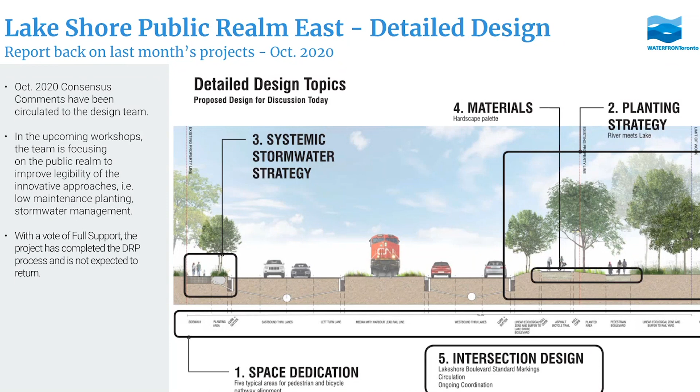Okay, next slide, Leon.

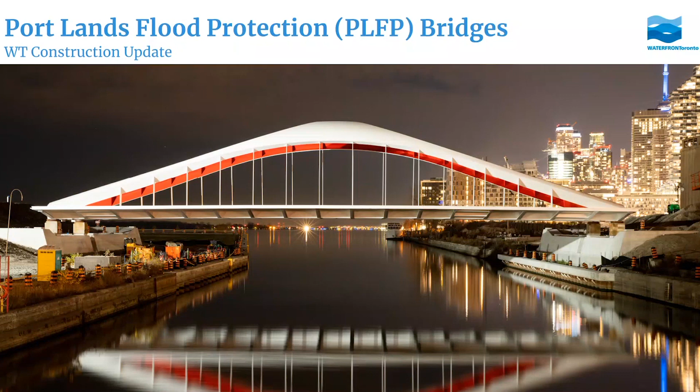Oh, and then Leon has an item. Yes, I wanted to just take a couple of minutes, if we can, at the end of the public session here, to show you an update on the DRP handbook covers. We spoke about these two months ago, and these are some of the comments I received, things to consider. So we took another stab at it, and it's still mock-ups at the moment. I'll show you a couple of options. We're really trying to find a direction that we like and can confidently give over to the graphic designer to keep working. The text, the logo, stuff you see there are just placeholders, but we're particularly interested in the image selection, and the number of images, or whether it sets the tone of what we were talking about a little bit better. So I have a couple of options here, starting with

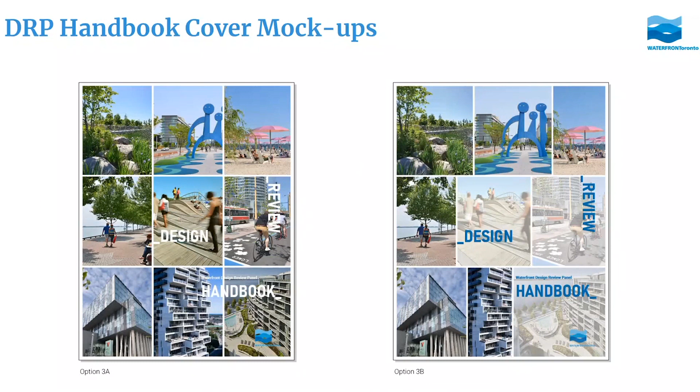Right, I agree George. Fadi here, if I could jump in real quick. I'm of the mind of keeping the main cover pretty minimal, then having maybe the first image, once you open the cover page, as a secondary title cover with some of the images of projects, so it keeps it nice and sleek and clean. Also, because there's a ton of projects in the pipeline, there's a way to be a little bit less self-referential and more within the branding overall of Waterfront Design Review - kind of those really beautiful illustrations of the annual report, for example, that has these really beautiful, very minimal, sleek graphics of the overall identity of Waterfront Toronto. But then you could easily open the first page after this one and see an image collage like this of key projects that demonstrate design excellence. But personally, just from pure personal taste, I love the minimal aesthetic of the other reports. So maybe something in that family, and then photographs come in as these amazing splash pages across the document that show some of the design excellence within it. But that's taste.

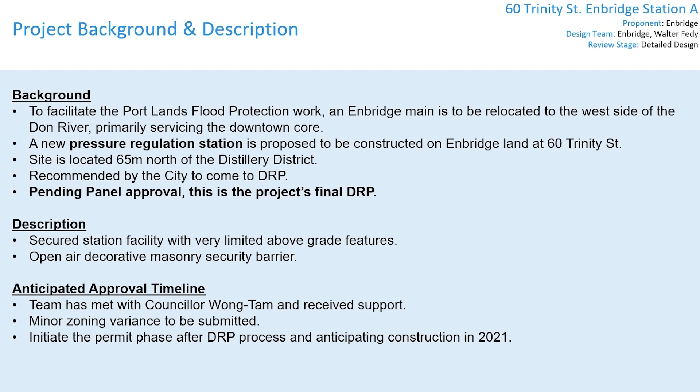Once again, the site is located north of the intersection of Mill Street and Trinity. There are future local streets A and B just south of the site. The site is located adjacent to many existing and future developments across from Blocks 3, 4, 7. The future Block 2 is just west of the site. It's also adjacent to the historic 50 Mill and Rack House D at 60 Mill.

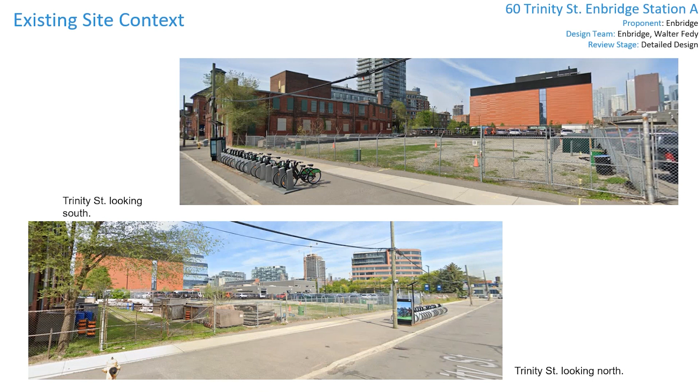This is the current condition of the site. The team came to DRP in July to present a hybrid schematic design and issues ID presentation. Today, they're here to address some specific panel comments and discuss some additional details.

These are the consensus comments from last time. It is important to reference the design of the adjacent development, Blocks 3, 4, 7, with regards to street frontage, facade materiality, and landscape context. Waterfront Toronto to share the documentation with the proponent that has been done. The site is located next to the most historic district of Toronto, so it's very important for the project to fit into both existing and future contexts. There are precedents of highly contextual hydro facilities, so carefully consider how this project can evolve the typology to respond to the site.

It's important to set a precedent for a well-integrated contextual public infrastructure facility building in the West Don Lands. For the building itself, consider the visual impact of the building and site as viewed from high up, and also consider revisiting the design of the roof structure to accommodate a green roof.

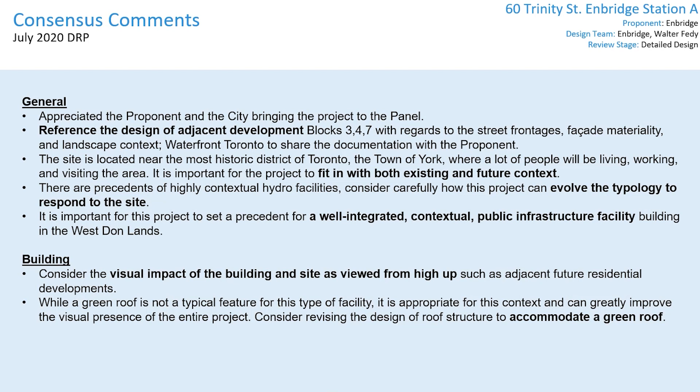For the perimeter wall, the panel was not supportive of the use of barbed wire and chain link fence. Consider alternative strategies. It was recommended to utilize a real brick finish and not painted precast, and also consider other animation strategies at the perimeter wall. Also consider the visual identity and signage use. For the landscape, consider planting trees in the corner to improve street level and aerial presence.

The panel voted for non-support for this project last time. So today we would like to ask the panel to consider: does the revised brick exterior adequately address the context of West Don Lands and the Distillery District? Do the revised perimeter details adequately balance the need for site security while supporting Waterfront Toronto's objectives of design excellence? Does the updated design improve the visual impact of the building as viewed from high up? And finally, is there sufficient lighting around the site so pedestrians would feel safe and secure at night?

Thank you. I would now like to introduce Mohammed from Enbridge to continue the design presentation.

Hello, Mohammed. Good morning. Thanks, Leon. Can you hear me clearly before I continue? Yes, I can. Okay, I'm going to go ahead and share my screen here.

Thanks again for inviting us, it's a great opportunity here. My name is Mohammed Salman, and I'm a senior advisor with engineering construction here with Enbridge. I'll be the project manager looking after the construction for this project. I've taken over from Mike Abate, who was here back in July. Some of the panel members might have been familiar with him - that's the reason for the change of faces here. Mike has moved on, and I've taken on this project from him.

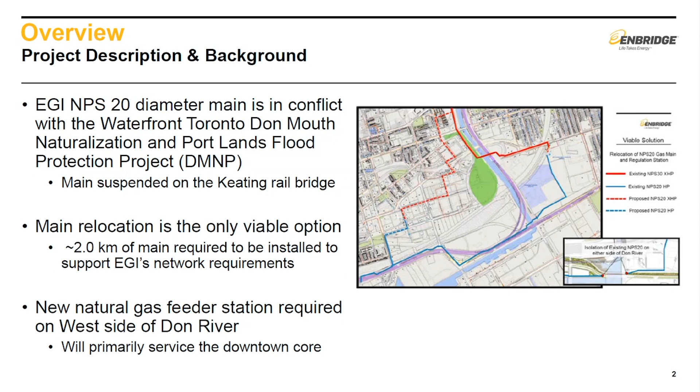I'll move on to the following slide, similar to what we discussed in the previous presentation, to highlight the key design requirements when we considered designing this facility. We had 5 key elements to consider. The top ones are functionality and safety, as well as site security, given the proximity to high density areas. We needed to ensure that the site does not generate noise, given the high profile and density of the area, as well as it being aesthetically pleasing and having reduced lighting. That's something we will elaborate on.

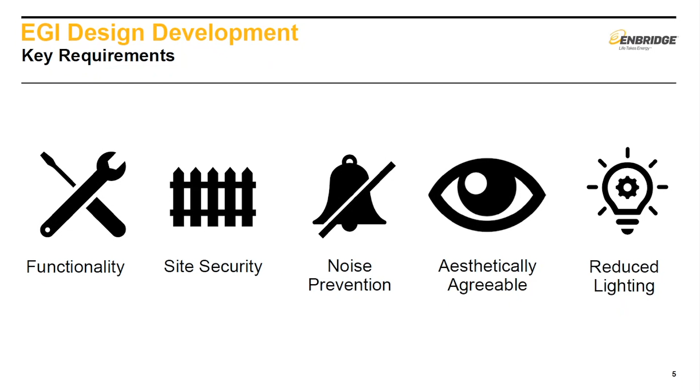I'll go on to the following slide, which talks in relative detail about what we considered additionally with regard to each of those areas. In terms of functionality, we ensured that the site only included elements that are necessary to the station function. It's something we cannot compromise on. We made sure that the station operation and safety are not compromised at all.

In terms of site security, we have a 5.1 meter tall open air decorative brick wall as a security barrier. It also has see-through features to accommodate the decorative aspect and fit into the site. We're also going to have an integrated site security system, connected to our real estate security system. In terms of noise prevention, I'd say this is a precedent we're setting for this type of station.

We've moved a lot of what could have been above grade facilities into below grade. These are the pressure regulating equipment that could have continuously produced humming noises that wouldn't have been acceptable in a site like this.

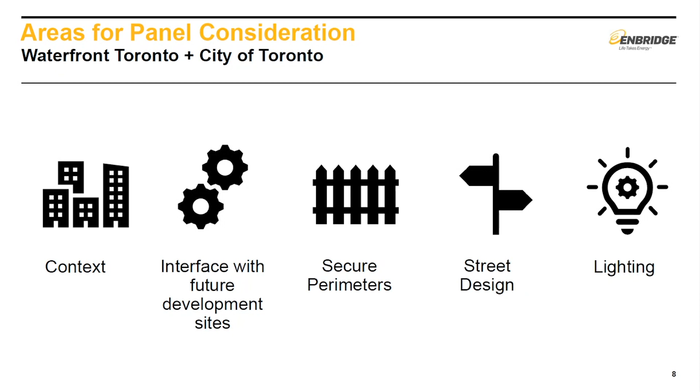I'm not going to cover this in detail—Leon just covered it in his presentation—but I just want to emphasize our awareness of what the DRP is looking for on this project site.

These slides might again be similar for the most part to what we've presented, just reiterating what our architects considered in coming up with the proposed design. We've gone out to see what the Distillery District, the most historic site in Toronto, looks like, and how we could fit in with the character, the history, and the context.

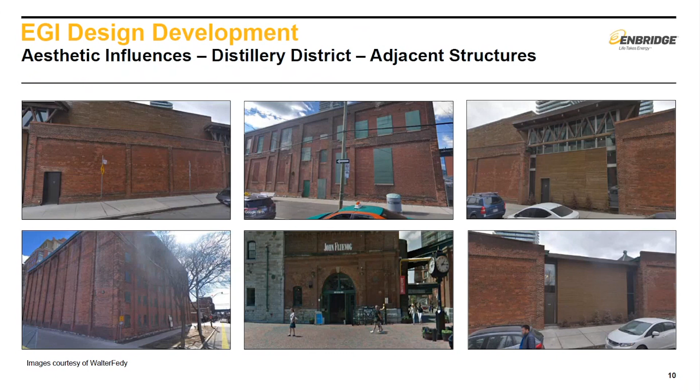This one talks specifically about adjacent structures and what the major elements look like, and the following slide talks about the presence of the period brick walls, which is what we've tried to adopt for our perimeter wall.

The following one talks specifically to lighting fixtures, examples of what exists today in the Distillery District, whether historic components or some of the newer developments and stores in the area.

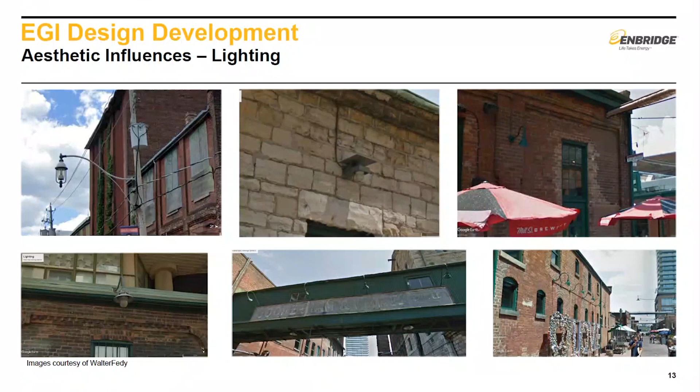If there are any questions, Stephen, our architect from WalterFedy, is available to comment on some of these questions, specifically what was considered during the architectural design.

So I'm going to move on. These slides essentially capture our current proposed design and reference the feedback we received back in July. Leon listed it, and I tried to put all the comments on one slide.

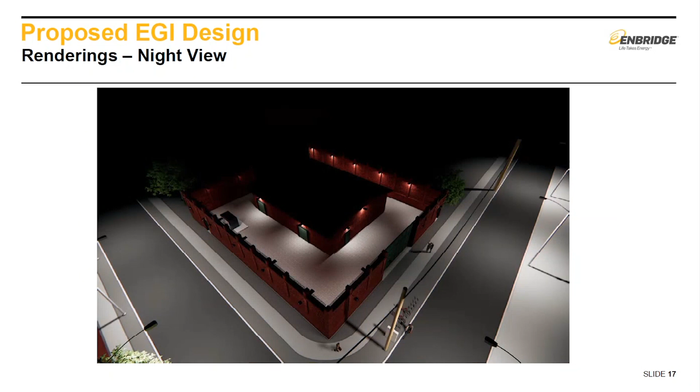I'm going to go to the other slide here, where you can see the 3D elements that we've incorporated in the brick wall, the gaps or the see-through. I think it's going to be both aesthetically pleasing for people to be able to see through for the site, as well as it addresses our own safety and security standards, where staff needs to be able to see if they're walking into a hazard or not. So I think we've certainly tried

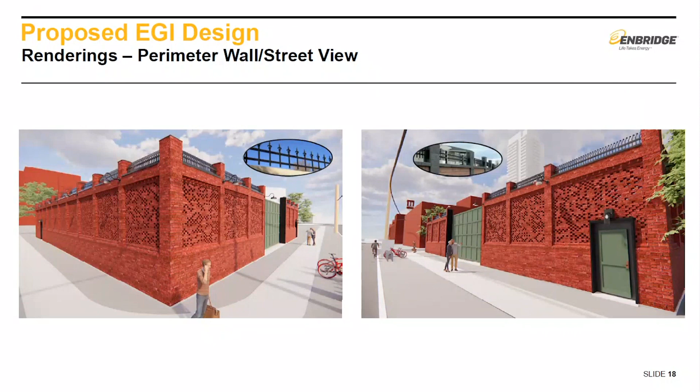to accommodate and have that conversation between our design requirements as well as the DRP's considerations. We're still working through the details for the wrought iron, so these are also examples of what it may look like, trying to incorporate it into the design. I'll move on to the following slide, which shows essentially the same views at night to demonstrate what it would look like with the lighting fixtures and so on.

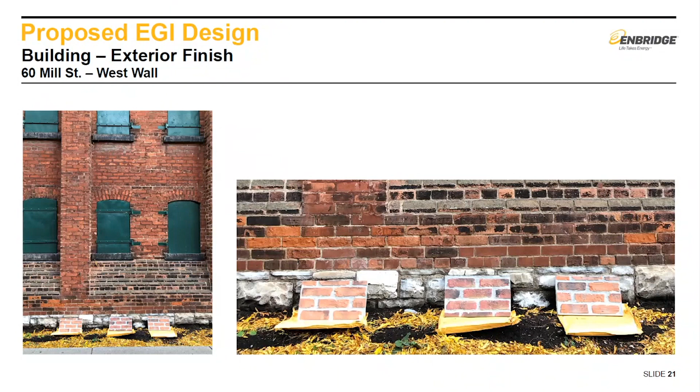The following slide is the same samples just against 60 Mill Street, the adjacent building to our station site. And like I said, we would like to hear what the DRP thinks between these 3 samples. These are only going to be used for the building, not for the exterior wall, which will be real small brick, to be more fitting in the distillery district in this area.

So with this, I'm just going to talk about the timelines. We're hoping that if we get a favorable decision from the DRP with the items we've addressed, we'll be able to move ahead with applying for permits with the City of Toronto, so that we're able to construct into possibly the second quarter of 2021, and get the station in service to accommodate the original request and timelines from Waterfront Toronto. We're certainly open for feedback and comments, but we're also hoping that by addressing most of the comments we've received, we can get a favorable solution here.

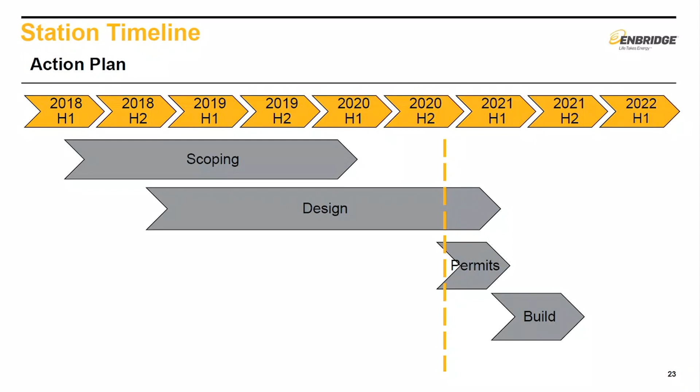And with that, I think this should conclude my presentation, Leon. But before I do so, if I can have a couple minutes before we get into questions to show a couple more renderings that I have in the appendix.

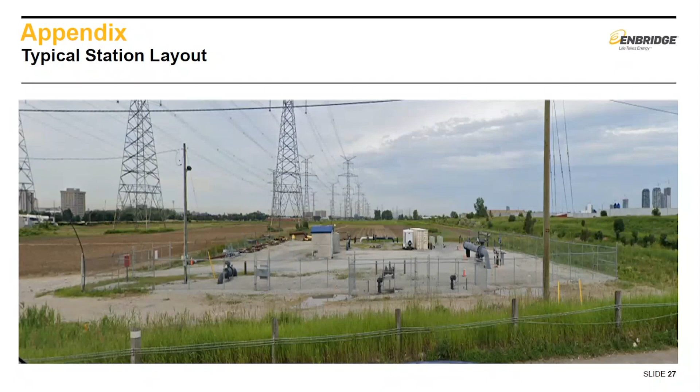This is what another station would have looked like, and I think it demonstrates how far our team, with the help of comments from the DRP, has departed from an existing design, to make sure that we're fitting in the character and history of the distillery district. That's another example of what it would look like, with components above grade, insulation applied, jersey barriers, and fencing inside — every separate component would have its own separate structure and building. It's not something that anyone would have liked or even proposed to have in an area of such historic and heritage value, but it's just to demonstrate

how responsive our team has been with the help from comments that we received from the DRP since July. With this, Leon, I think I'll give it back to see if there are points for discussion or questions.

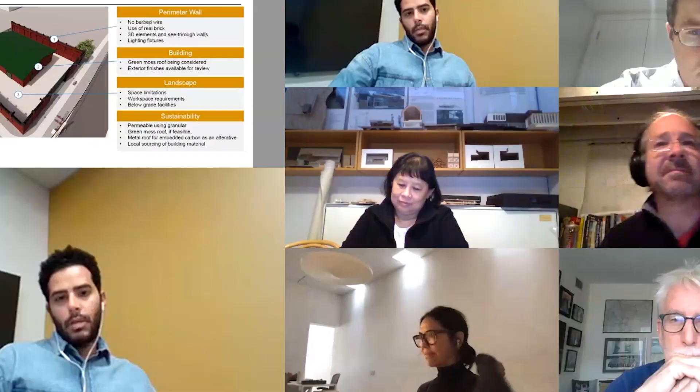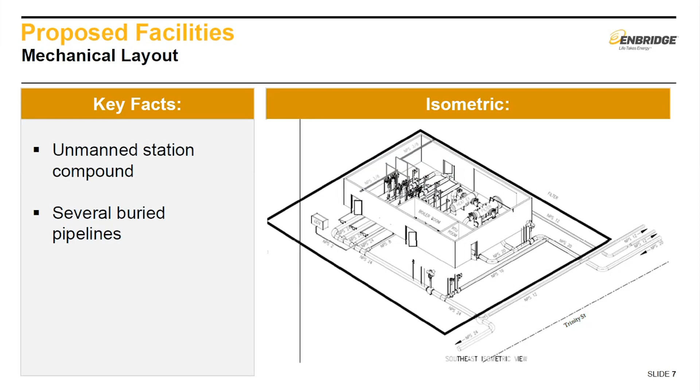My understanding from our design folks - let me share my screen again before getting into the details. I'm going to jump between this slide and this slide back here where we have the equipment. So if you can visualize where the roof is, this side, the western part of the building, is where we anticipate the removal of the roof would be needed to facilitate the future replacement of those below grade facilities. If you had a north-south division and cut it in thirds, the western third is probably a place where you wouldn't be able to accommodate the sedum roof.

We've been working to try and avoid this. All these doors on all the sides of the building would facilitate whatever maintenance is needed. On the north side, we even have a garage size door that would both be aesthetically pleasing and at the same time functional for us to get in whatever equipment to do replacement to both the filter and the heater.

On the west side, that's where the major undertaking will be taking place in the future when we go and replace the below grade regulators. The roof would have to be removed, cranes would have to be present, excavation will have to take place, and that's in big part why one third of that would not be green roof.

And my last very quick question, seeing the gate at the back on the west side, I'm assuming there's some kind of laneway as part of the block. Is it through a laneway, or is that wall slightly inside your property? In the future when the car dealership develops, is it through their property? Just trying to understand.

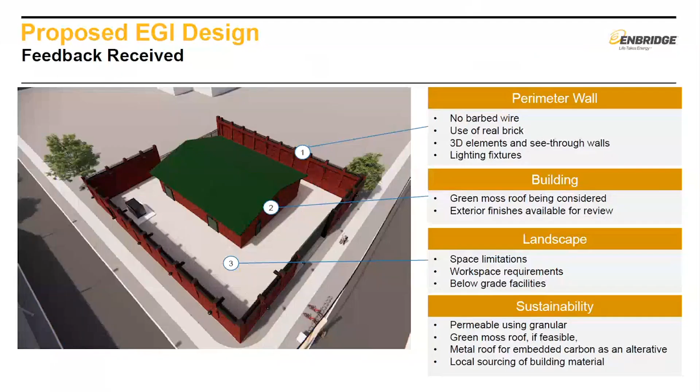Thanks very much for the presentation, and I concur with my colleagues. It's much improved, and it's appreciated that you'll be constructing the perimeter wall out of brick. Whether it be brick embedded into precast is something you could also consider. I realize these are precast options, but I want to point out, reinforcing Bridget's comment, that the type of brick is absolutely critical to how this wall will appear. And also the grout joint.

With most of the older buildings in the distillery district, the joint between the bricks is usually quite narrow. Your mock-up, which I realize is for the building, and I'd agree brick isn't necessary on the building, has a very wide grout line. So as your architect works through detailing the perimeter wall, that joint really needs to be considered. It really shouldn't be, even 10 millimeters is out of character with the heritage brick walls in the distillery district. You can find a brick that will be different, but look for a molded brick, not a pressed brick. It won't be identical, but it will have that softer kind of appearance. So really pay attention to grout joints and a molded brick.

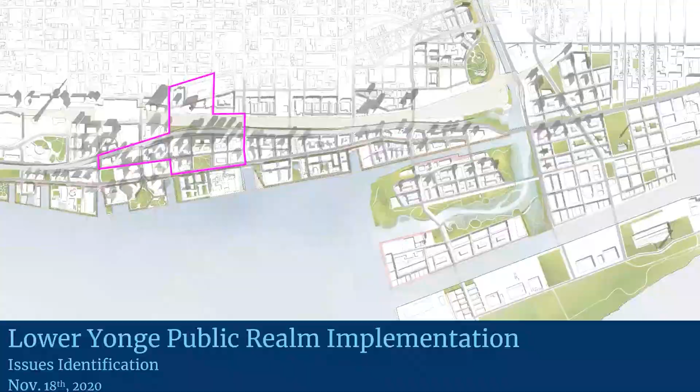I also want to note, this project is a culmination of several previous projects that have come before the panel, including the Lower Yonge Public Realm Plan, the Lower Yonge Precinct Plan, and the Lower Yonge Precinct EA. I'll now turn it over to Prabir with City of Toronto to present the project background, context, and schedule.

Thanks, Adam. Who will be changing the slides? Can you help me with that? Yes, okay, perfect, thanks a lot. So hi everyone, this is Prabir Das. I'm working for the city, and I am the project manager from the city's end on this assignment.

Thanks for the opportunity to present the overall scope and timelines and much more details to the design review panel. I'll go through a couple of introductory slides giving overall area, 30% scope, and timeline. We have our consultants also present, and they will be sharing some of the items in much more detail.

From the city, the consultant working on this file is WSP, and Jim is the PM on this team. And Nader from City Planning is the project support from this end. Adam already mentioned his area of involvement on this file from Waterfront Toronto.

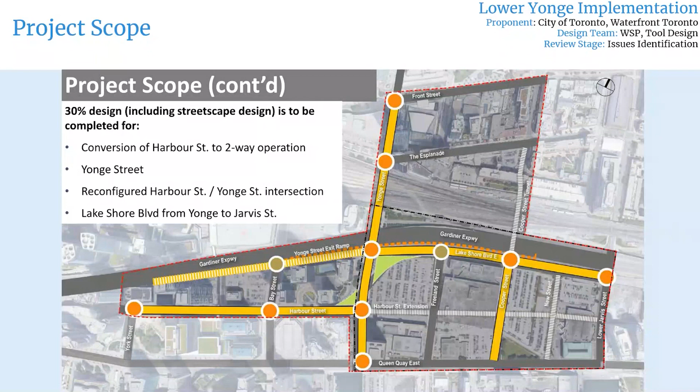Basically, each of these scopes will be further detailed down by our consultant team to all of you later today. But at a high level, that's the scope we are working on. So, if we go to the next slide, that's the timeline.

So that was from our city end. We are really happy to present our initial thinking, where we are, and what scopes we are keeping in mind. We're quite open to get feedback from the team at this DRP, and we can start any conversation to see the merit of the feedback and how we can accommodate it. Thank you.

Now I'd like to summarize the recap from the September 2015 DRP given for the public realm strategy consensus comments. The comments were: what is the city getting back, and what is it going to look like 10 to 50 years from now? In terms of principles, density will be fine, provided transit infrastructure is there to support it and community services are in place. It is absolutely critical for these to be in place.

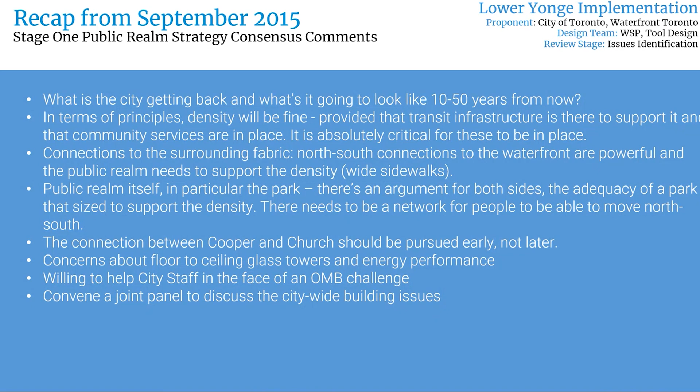The connection between Cooper and Church should be pursued earlier, not later. There were concerns about the floor-to-ceiling glass towers and energy performance, willing to help city staff in the face of an OMB challenge, and convene a joint panel to discuss citywide building issues.

The project also came back in December 2015 for stage 2, and the consensus comments were as follows: the panel will accept the location of the proposed park.

The emphasis on north-south promenade connections is good. There should be no above-grade bridges within the precinct area, and perhaps consider whether it's necessary to have a bridge over Lake Shore Boulevard. Be cognizant of the heritage buildings on site. A public art plan is an important aspect to create a strong public realm for the precinct. The panel voted unanimously in support of the project.

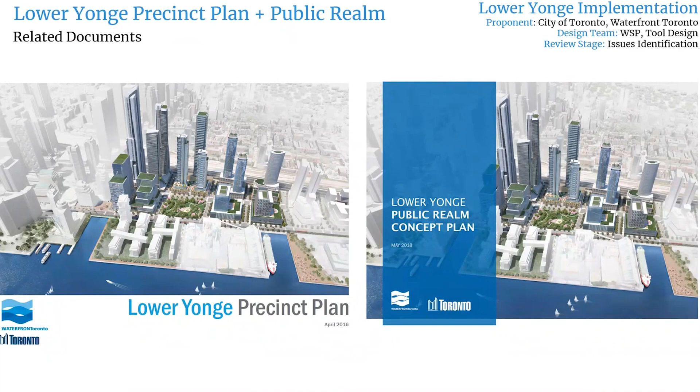I also want to summarize in more detail these background projects, including the precinct plan and the public realm plan, for the panel's reference, as this project builds upon those.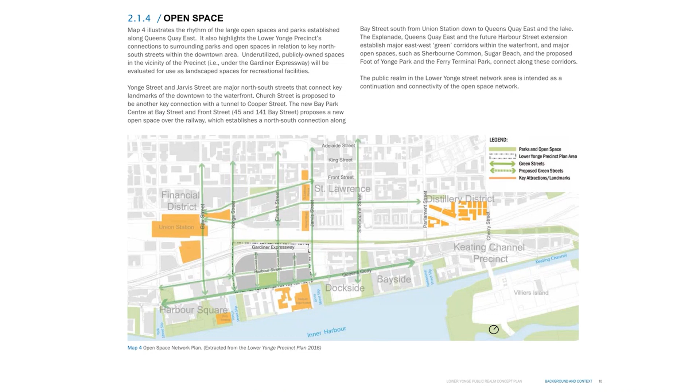Also want to highlight Lower Yonge's connections to the surrounding park and public space in relation to key north-south streets within the downtown core - that's one of the main objectives of this project. We also want to encourage the activation and connection to underutilized publicly owned spaces in the vicinity of Lower Yonge, such as under the Gardiner.

We're also looking at mid-block connections within the public realm plan. The plan illustrated a finer grain network to connect people through building sites and enhance pedestrian permeability. We're striving to encourage walking and discourage the use of automobiles for short trips.

Within the public realm plan, we also identified 4 types of streets. I'll go through the hierarchy: the intention is Queens Quay East would be a main street primary, and Harbor Street would be a main street local - the two major east-west streets.

In terms of promenade streets, really enforcing the north-south connection: starting on the west, Yonge is first, then Cooper, and Lower Jarvis. In terms of neighborhood streets, Freeland and New Street are considered the neighborhood streets.

I also want to quickly highlight, since this is the only spot I'm showing it in plan, the public realm plan also emphasized and dictated the various hierarchies for the street trees lining the street. The intention is Queens Quay has a triple alley of trees, one row on the north, two on the south. Harbor Street has a double alley, one row on the north, one on the south. Yonge, Cooper, and Jarvis all have a triple alley, and Freeland and New Street all have a double alley.

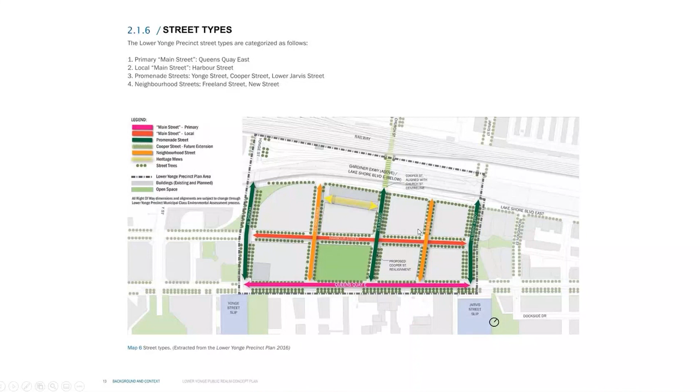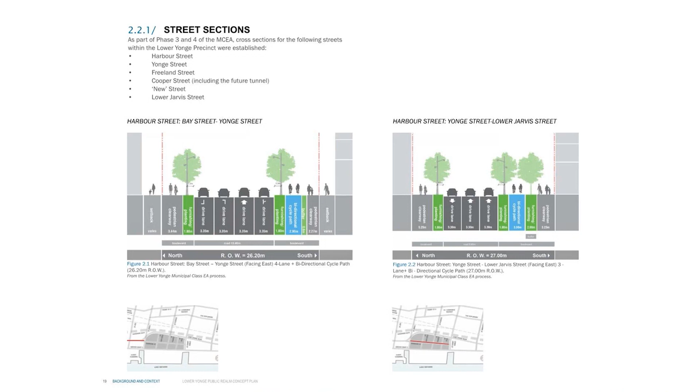I'll quickly go through the street sections, since WSP will cover this in more detail in their presentation. But essentially for Harbor Street, between Bay and Yonge, we're proposing a 4-lane street with a bidirectional cycle track. And for Harbor, between Yonge and Lower Jarvis, we're proposing 3 lanes with a bidirectional cycle path.

Next, moving on to Yonge, the north-south connection. South of Harbor, 3 lanes with unidirectional cycle tracks is proposed. North of Harbor to Lakeshore, 4 lanes with unidirectional cycle track is proposed for the street section.

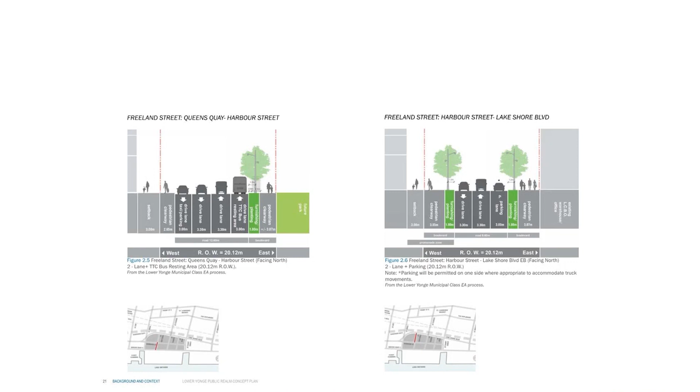Moving to Freeland Street, still a north-south connection but one street to the east. Between Queens Quay and Harbor, a 2-lane street with TTC resting area is being proposed. Between Harbor and Lakeshore, 2 lanes plus parking is being proposed where appropriate.

Moving further east, on Cooper between Queens Quay and Lakeshore, we're proposing 3 lanes with a future unidirectional bike facility. On New Street, 2 lanes plus parking. On Lower Jarvis, 4 lanes plus off-peak parking plus unidirectional cycle tracks. And on Lakeshore, 3 lanes plus a wider boulevard.

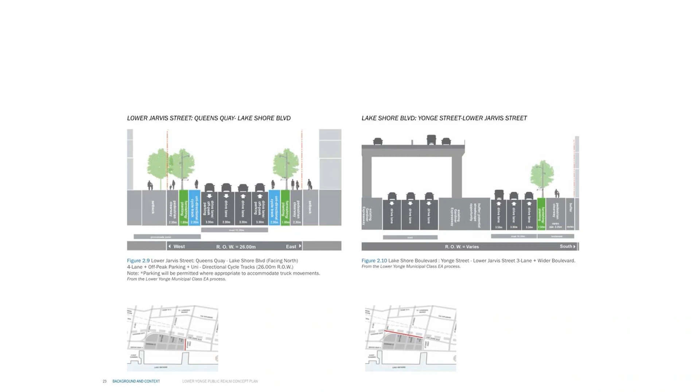I also want to quickly highlight the streetscape plan, as WSP will go into more detail. The main objective was to provide a paving palette for consistency, creating a coherent sense of identity within the precinct, and to provide consistency throughout the rest of the waterfront.

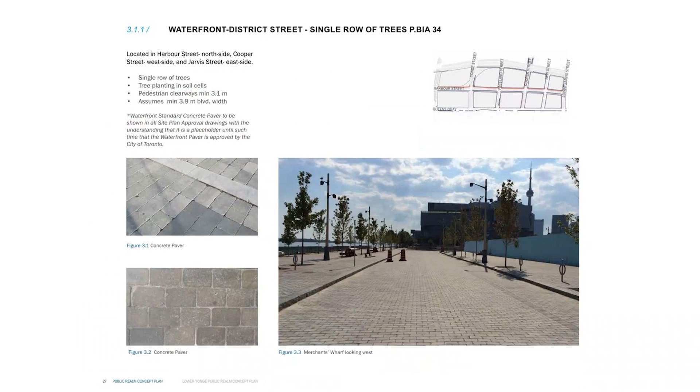With regards to street materials: on the north side of Harbor Street, Cooper Street, and Jarvis, we're proposing a single row of trees with our typical concrete paver. For Yonge Street on the east side, Cooper Street on the east side, and Jarvis Street on the west side, we're proposing a double alley of trees with the traditional concrete paver.

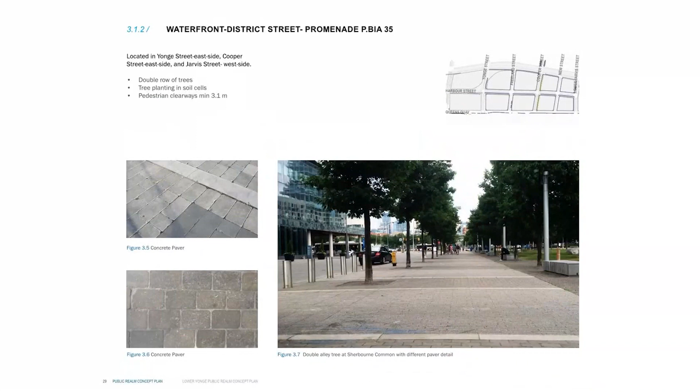For Harbor Street on the south side, we're proposing a double row of trees combined with cast-in-place concrete and concrete pavers. For the service streets, Yonge on the west side, Freeland Street and New Street, we're proposing a single row of trees and cast-in-place concrete paving.

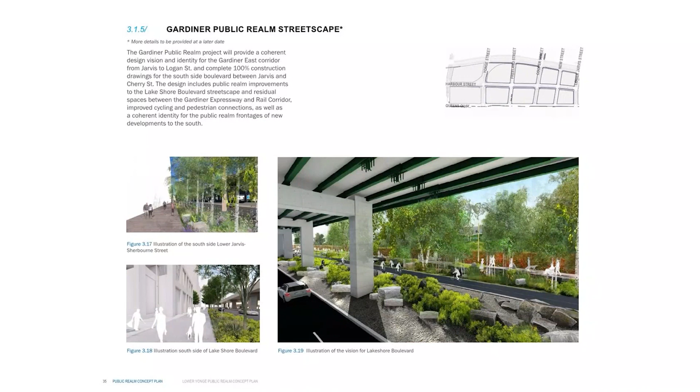For the Gardiner public realm, we're also acknowledging that we want to create a consistent identity with the rest of the Gardiner public streetscape realm. Lastly, for Queens Quay, for reference in the interim condition, we're proposing a double row of trees on the south and a single row on the north.

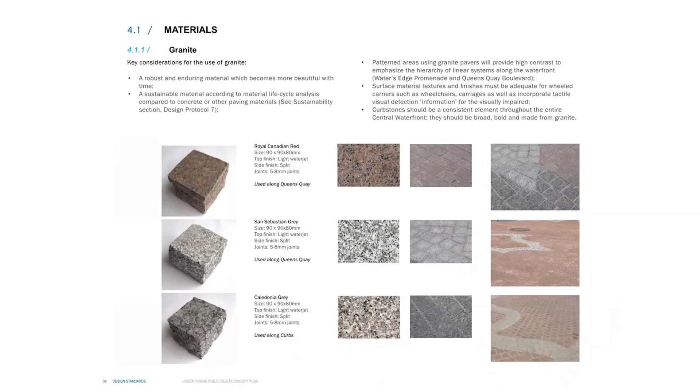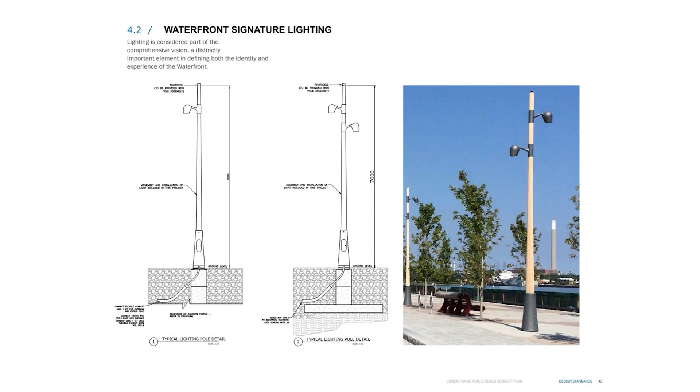Lastly, I want to touch on materials and design standards from the public realm plan. Consistent with the rest of the waterfront: granite in the colors used elsewhere, concrete pavers as used elsewhere, cast-in-place concrete—we're still considering the exact standard for the concrete. The idea is a signature light pole consistent with the waterfront, a consistent family of street furniture, and consistent planting details.

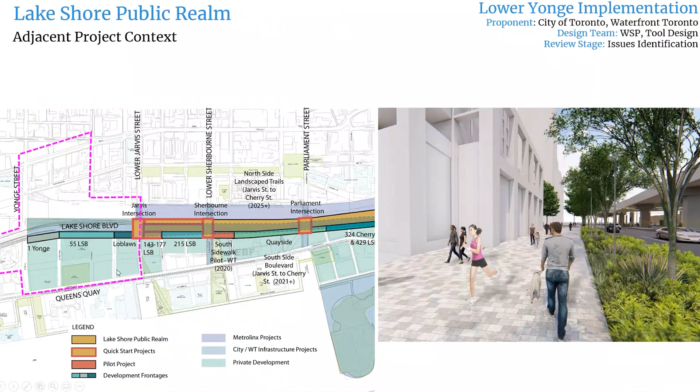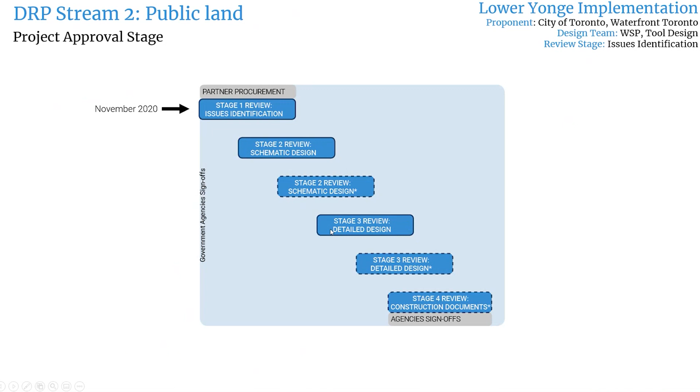Lastly, I want to go through the DRP process for this project. Right now we're at November 2020 for issues ID, and we intend to come back in the future for stage 2 schematic design, stage 3 detailed design, and at some point in the future for stage 4 construction documents as required.

Lastly, areas for panel consideration: first, ensuring the precinct vision is adequately implemented in preliminary and detailed design; integration with adjacent major projects and other efforts done to date, such as Lakeshore Boulevard work; ensuring the configuration of street trees meets the vision documented in the Lower Yonge precinct plan; and looking at material and furniture alignments as defined in the Lower Yonge precinct plan, maintaining consistency with waterfront standards.

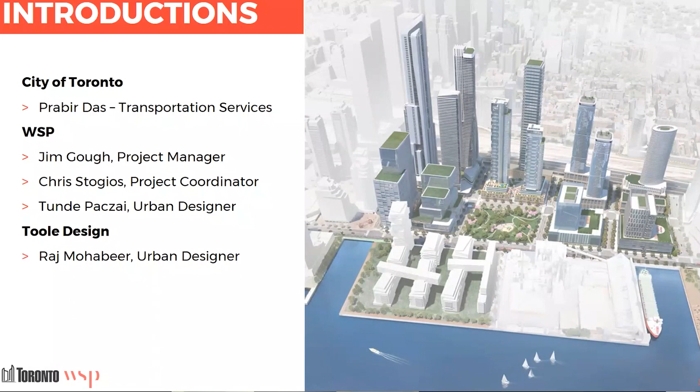Tunde, next. So Prabir already kind of introduced the team from WSP. I'm the project manager. Chris Stogios is on the line, I think, and he's the project coordinator. Tunde is the urban designer, and we also have Toole Design helping out as well.

Next, so the project description very quickly. The Lower Yonge precinct boundary is shown as the black dashed line, which you're all probably familiar with. The city in their RFP to us actually expanded that to include the area shown in the red dashed line, just to include a couple of other projects that we'll talk about in a moment.

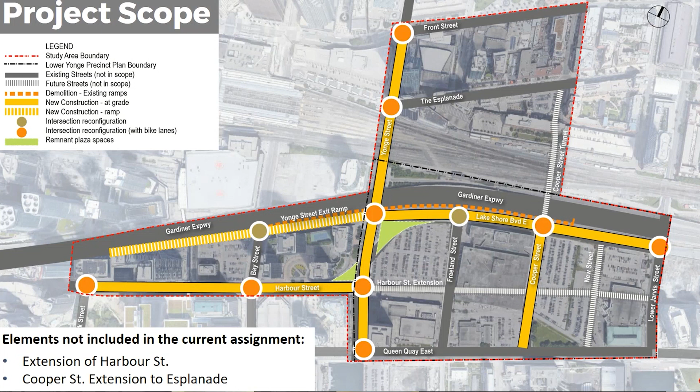Next, so the project scope, Prabir already showed this slide. I just want to highlight things that are not included, and those are the extension of Harbour Street east of Yonge over to Jarvis, the Cooper extension to the Esplanade, and also the new street running north-south between Cooper and Lower Jarvis. The two southerly pieces there are going to be delivered by Pinnacle and Menkes, and the Cooper Street tunnel is down the road in terms of the city's planning for that.

Tunde? So what is included is the 30% design, including streetscape, for the conversion of Harbour Street to two-way operation, the changes to Yonge Street, the reconfigured Harbour-Yonge intersection, and Lakeshore Boulevard expansion from Yonge over to Jarvis Street. Next.

Just breaking that down a bit, the first thing we would do, not necessarily in chronological order, but one of the key things is to remove the Gardiner Expressway ramps, the eastbound Bay Street on-ramp, and the eastbound Jarvis Street off-ramp. Next.

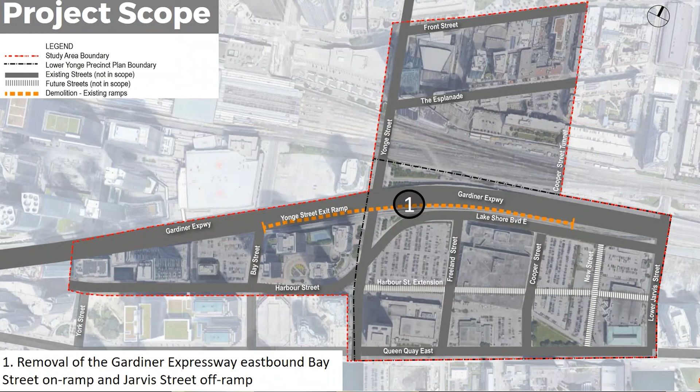And then we would replace the Jarvis Street off-ramp to some degree by a new ramp that would touch down at Yonge Street instead, connecting to Lakeshore Boulevard.

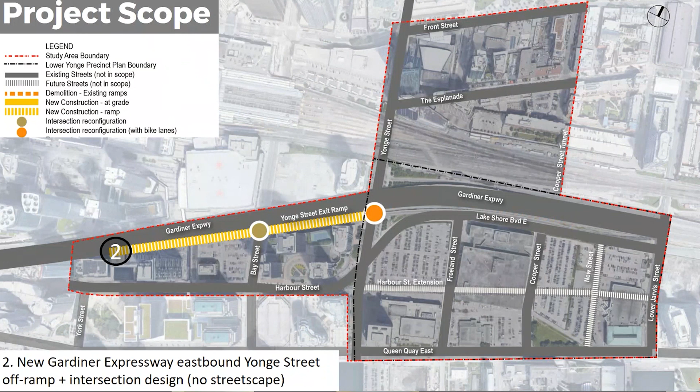Fourth is preliminary engineering design for conversion of Harbour Street to two-way operation between York and Yonge Street, including streetscape improvements. This is largely a matter of restriping. No widening of the street is actually planned as part of this. Next.

On Yonge Street, what we're planning to do is install the cycling infrastructure from Queens Quay up to Front Street and any relevant intersection designs that go along with that. Next.

Number 6 is just defining the profile of Cooper Street between Queens Quay and Lakeshore Boulevard and making sure that the intersection design can accommodate the future tunnel that will lead north from Lakeshore under the Gardiner and the rail corridor. Next.

Number 7 is the conceptual design for the two remnant plaza spaces at the Yonge Harbour intersection when we reconfigure that to a typical cross intersection.

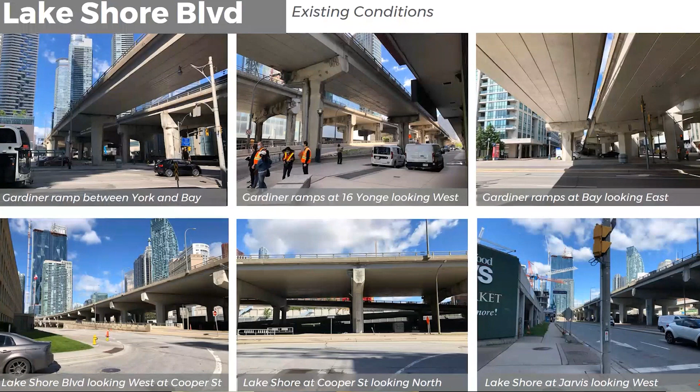You can see the Gardiner ramp between York and Bay, the two eastbound Gardiner on and off ramps currently crossing the airspace between the 16 Yonge parcel and the Gardiner. The pedestrian realm is generally poor, not conducive for walking along the entire stretch, with partial narrow sidewalks on the south side only between Yonge and Jarvis. There are no trees, no bike lanes, minimal indirect street lighting.

A quick overview of the EA plan and cross sections for Lakeshore. The construction of the new Gardiner Expressway eastbound Yonge Street off-ramp between Bay and Yonge is meant to have streetscape along Lakeshore between Yonge and Jarvis. We're also going to look at the intersection designs, proposing streetscape tree planting and sidewalk improvement on the south side.

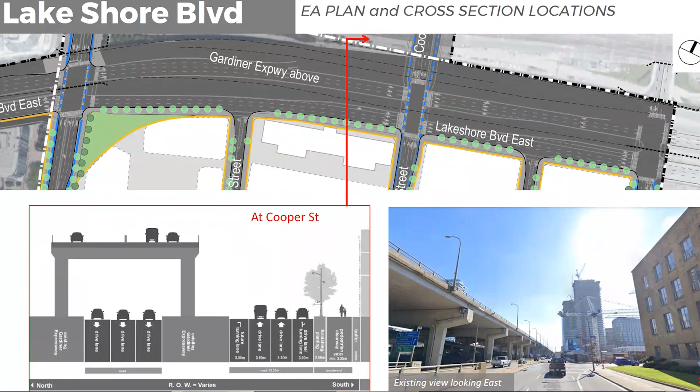Within this stretch, there are two distinct segments. Between Yonge and Cooper Street, we have 3 lanes with 2 turning lanes, and the proposed solution is the same number of lanes with a wider boulevard. The next segment, between Cooper and Jarvis, currently has 3 lanes with 2 turning lanes, with the same proposal of a wider boulevard.

A few considerations for the area are really the coordination with the Gardiner Public Realm Plan. On the south side, we're considering new trees to be planted in tree grates with soil cells, a 2.4 meter pedestrian clearway, and on the north side, the landscaping of the residual space, whatever that might look like.

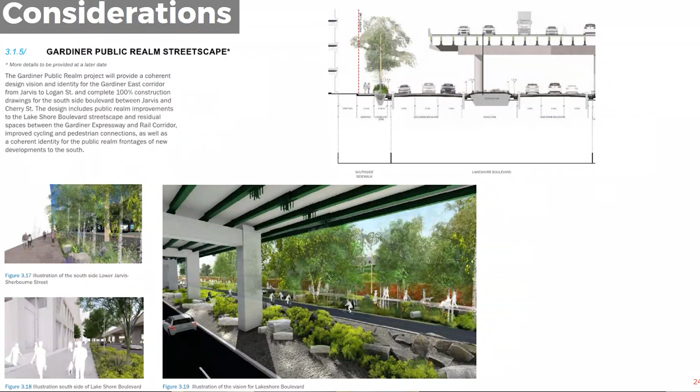A few key issues here are really the consideration for the under-the-Gardiner design development and coordination with that project. In terms of inspiration, we're looking at having some historical accents on the hardscape, some vertical wall or embankment, temporary seasonal art projections at the tunnel, and integrating lighting design for that future underpass at Cooper. That's really where we see an opportunity to do something more meaningful in terms of design.

Harbour Street. That's just a quick view of Harbour Street North on the north side looking east at Yonge. I'm not going to repeat this, but we're really looking at mainly working beyond the curb and towards the property line to improve the sidewalk and streetscape, as well as the intersection redesign at Yonge Street.

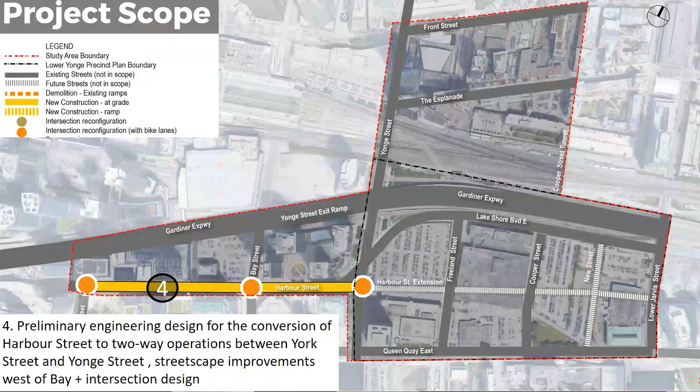Current conditions show one-way traffic operations between York and Yonge Street. Streetscape improvements are completed west of Bay, including the installation of the bidirectional cycle track on the south side, low-profile black granite planters, granite plank pavers on the north side, and updated city light standards. However, east of Bay is where the general existing conditions of the streetscape paving and furnishings are poor—aging and in need of repairs and updates. So perfect timing for us to come in.

Just a quick overview of the EA plan. You will see there's two distinct segments here that we're looking at: the conversion of the two-way operations between York and Yonge Street being the major move, and then the intersection reconfiguration and realignment of the right-of-way.

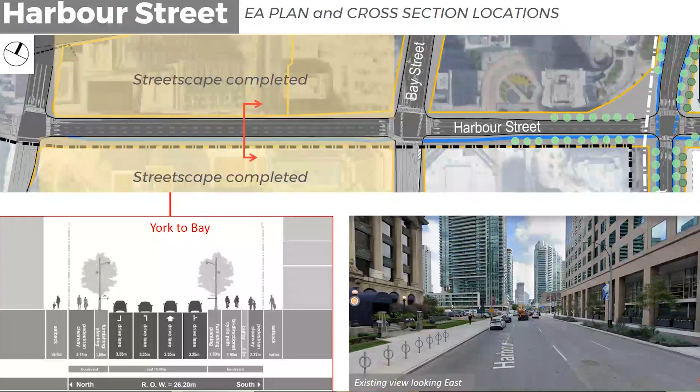In the first segment, as I mentioned, most of the streetscape has already been completed west of Bay. The 4 lanes with one-way traffic currently there, and the bidirectional cycle track, will be converted now to 2-way traffic.

Okay, Harbour, Bay to Yonge.

We're proposing a 4-lane 2-way traffic with a cycle track and planting and street lighting improvements, and complete reconfiguration at Yonge with major changes for the public realm in front of 16 Yonge. 16 Yonge is where we'll have to coordinate delicately with the existing development there, and that conversation has already started.

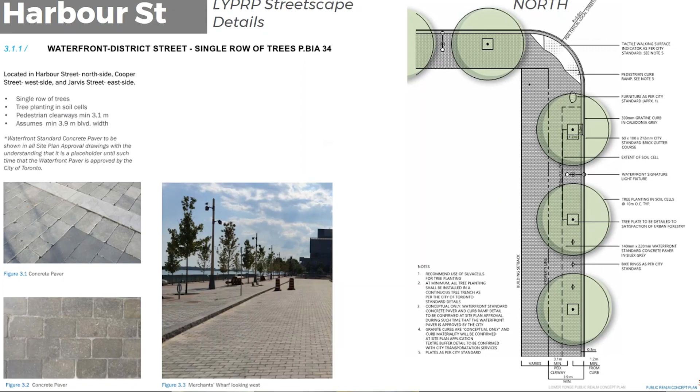Quick reminder of the public realm plan streetscape details. On the north side, there's a single row of trees in soil cells being proposed with a 3.1 meter pedestrian clearway and the standard waterfront concrete pavers. On the south side, we are looking at a double row of trees with soil cells, a clearway of 3.1 meters, and that bidirectional cycle track.

Inspiration for this area, similar, looking at historical accents on the hardscape, some ample seating, tree plantings, and water and mist features to be added to the Northwest Plaza redesign at Harbour and Yonge.

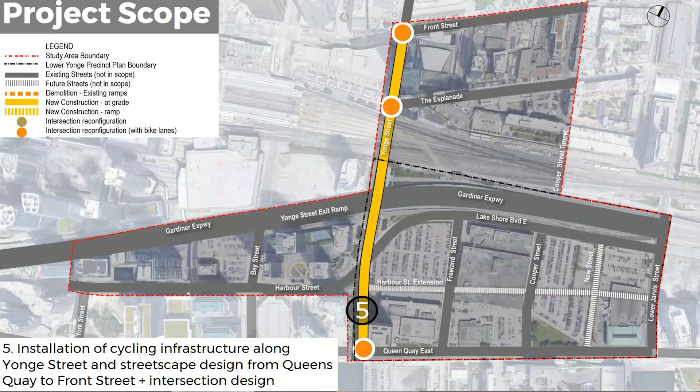And now moving on to Yonge Street. This is a quick view of the current conditions looking south from the west side of the street. The project scope, like Jim mentioned, is really the installation of the cycling infrastructure along Yonge on both sides, streetscape design from Queens Quay to Front, and the intersection designs.

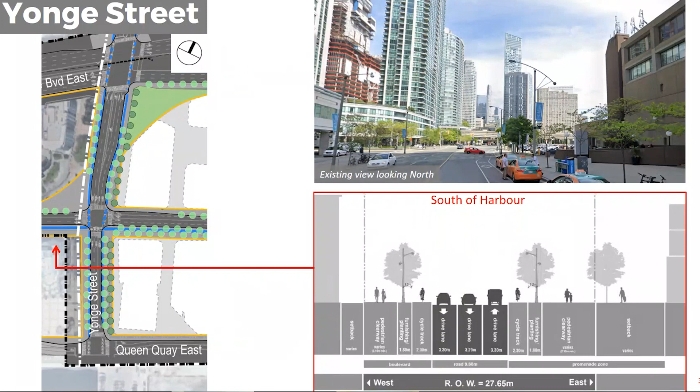Quick snapshot of the 5 distinct segments. The first is at Queens Quay, between Queens Quay and Harbour, where we have 3 lanes with separated cycle tracks proposed, a single row of trees inside the right-of-way and a second row beyond the property line where possible. The next segment, between Harbour and Lakeshore, has 4 lanes plus separated cycle tracks and a single row of trees in tree grates.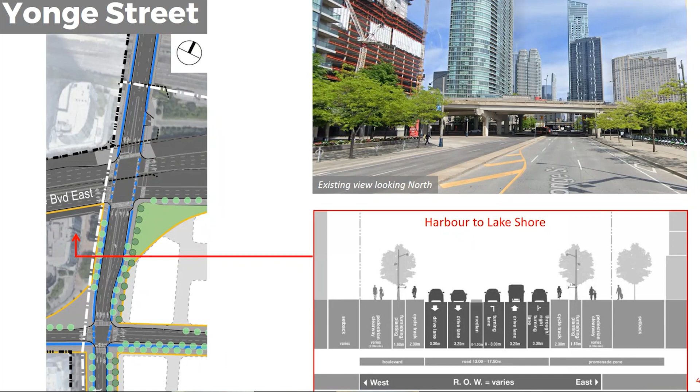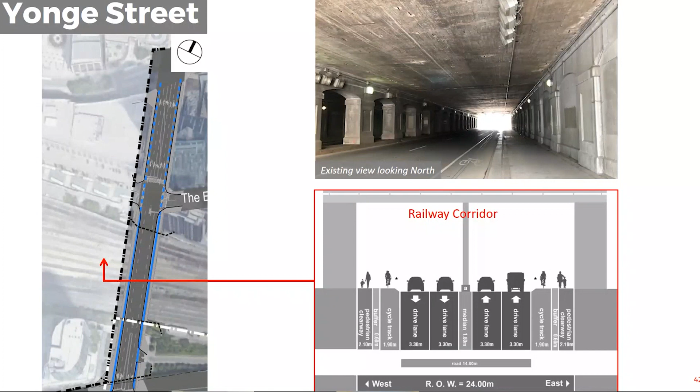Next is between Lakeshore and the railway, where we only have 4 lanes with a median, separate cycle tracks, and fully mountable curbs, but no tree planting in this segment. Under the rail corridor, we're proposing 4 lanes plus median, separate cycle tracks with fully mountable curbs, and improvements to the tunnel and lighting. Beyond that, the last segment between rail and Front Street has 4 lanes, a turning lane, and on-road bike lanes - we can't have them separated as per the EA.

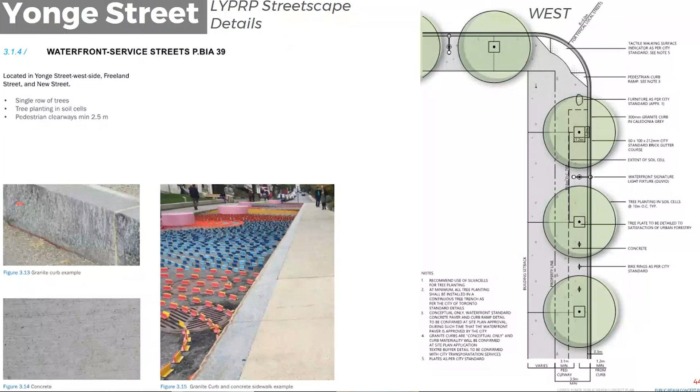A reminder of the Lower Yonge public realm plan details for this area. On the west side of Yonge, we have a single row of trees in tree grates, soil tree plantings, and a 2.5 meter pedestrian concrete clearway. On the east side, we have a double row of trees in tree grates, soil tree plantings, and a 3.1 meter pedestrian clearway with concrete pavers. The key issue here is accommodating the second row of trees within the right-of-way, as the EA shows this being in private property.

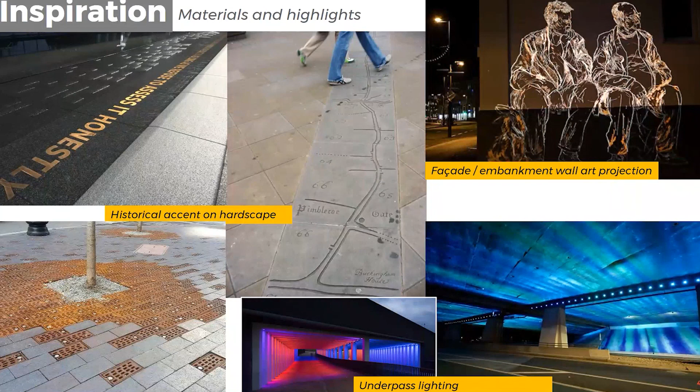Inspiration, not too dissimilar to the previously mentioned streets. We will look at historical accents on the hardscape, vertical wall embankment, temporary seasonal art projections, applied lighting, and projection on the underpass, as we can't completely redesign it.

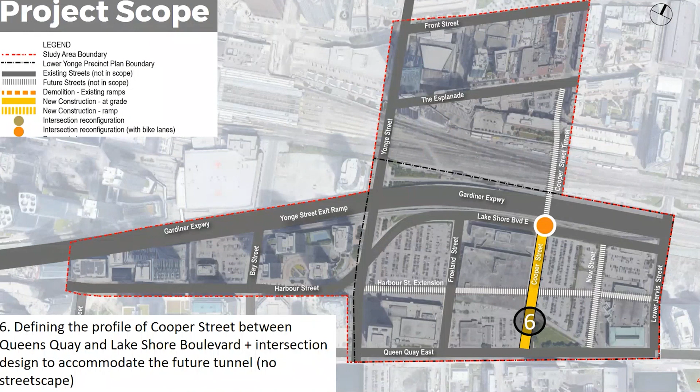Now, Cooper Street - as Jim mentioned, we have limited intervention here. Jim's team will be redefining the profile of the street between Queens Quay and Lakeshore, and the intersection design is what we'll be looking at in more detail to accommodate that future tunnel. No streetscaping, unfortunately.

Okay, next this is a quick overview of the EA plan and the cross sections associated in the area.

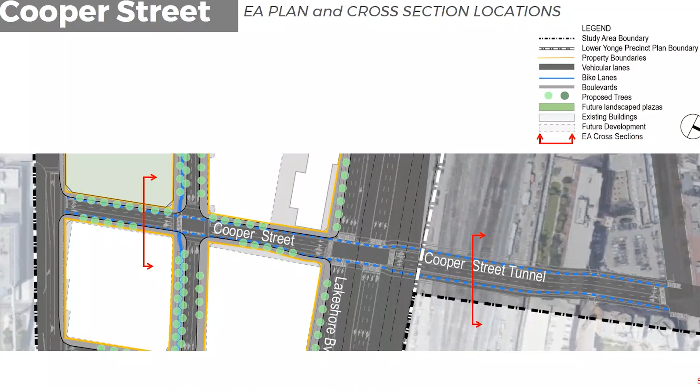Between Queensquay and Lakeshore, we have on-street cycle tracks, a single row of tree plantings, and sidewalks. You can see the extension to Esplanade through the tunnel beneath the rails here, and this is the tunnel alignment. You'll see we have 4 lanes of traffic, 2 on either side, a completely physically separated pedestrian clearway, and the cycle tracks in that tunnel.

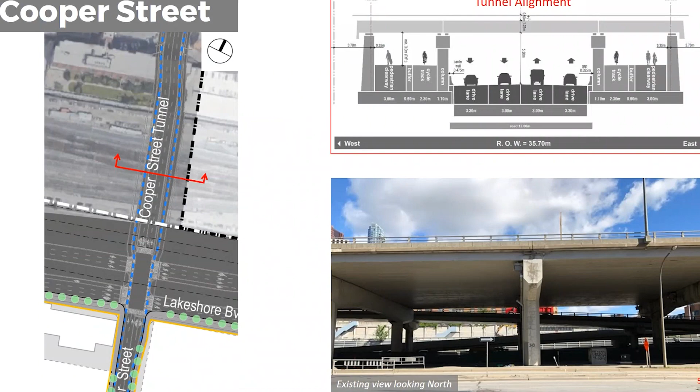In terms of the plaza design—sorry, that was a wrong image there. As Jim mentioned, due to the reconfiguration of Harbor and Lakeshore, there are some remnant plaza spaces that will be integrated into those adjacent parcels. We'll be looking at some preliminary design ideas or considerations to be coordinated with the designers for these.

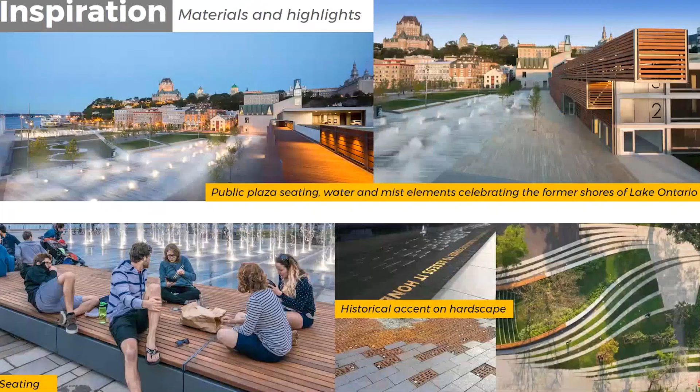And on the southwest corner—sorry, this is northwest, I'm getting confused—the proposed configuration of Lakeshore results again in some additional plaza enhancement opportunities for us. The inspiration for the two will be some materials, public plaza seating, water and mist elements celebrating the former shores of Lake Ontario, historical accents on the hardscape, and ample seating.

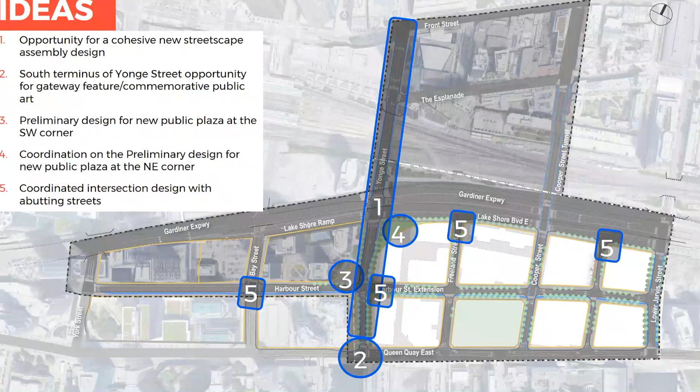A few of the ideas we wanted to highlight at the moment—I know this is early on, but this is what we've seen so far for a cohesive new streetscape assembly design. Number 2, the south terminus of Yonge Street has an opportunity for a gateway feature and commemorative public art. And third, the preliminary design for new public plazas at the southwest corner, coordination on the preliminary design for new public plaza at the northeast corner, and coordination of the intersection designs with the abutting streets and adjacent developments.

A few considerations again in terms of the existing pavement type—quite a variety of paving currently throughout the study area. Various improvements have been started, but we need to make sure we have a cohesive approach to these.

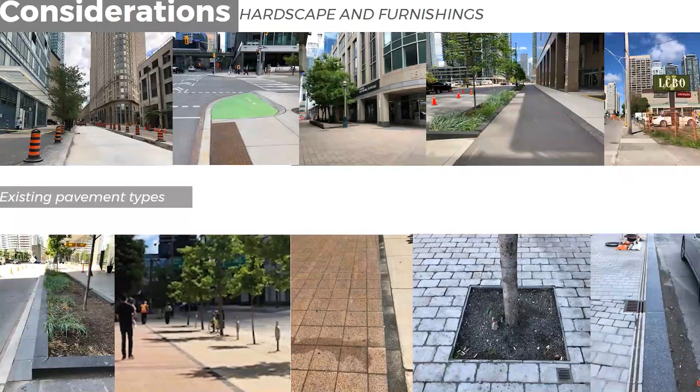In terms of inspiration for us, as I mentioned throughout the presentation, for the plaza design in particular we want to draw inspiration from the historical past of the area, remembering the shores of Lake Ontario and its cultural and indigenous past. Water will be a key design element for us, and since we're so close to the water, we see this as an opportunity to add it as a key design element for the plazas—a reminder of the proximity to Lake Ontario and the harbor.

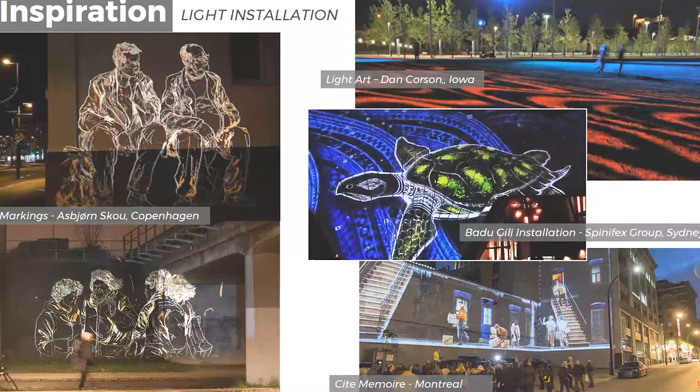So we propose a stronger celebration of Yonge Street's southern terminus through public art and landscaping elements that integrate this in the streetscape design. Light installation is another element we'd like to integrate in the streetscape, so we'll look at some ideas to improve lighting throughout, finding inspiration and celebrating the cultural and historical significance of the area.

What I'm showing here are a few precedents we really liked. On the left, markings showing a Danish precedent from an artist who scratched contemporary scenes into black slides for a projector. The second, Badu Gili, a precedent from Australia, where a year-round projection at sunset tells stories of ancient First Nations in a 7-minute projection—this is at the Sydney Opera House. And then Cité Mémoire in Montreal, a precedent where the artist wanted to tell the story of the city's past and how people lived through projections on remnant and empty facades.

Continuing on the lighting theme, we feel there's an opportunity to introduce some temporary lighting fixtures in the plazas, additional open space light installations, and decorative lighting for the underpass and the tunnel. We have a few really strong precedents we liked and wanted to mention here.

In terms of our next steps, as Jim mentioned, we are completing the site investigations. We're talking to stakeholders and learning quite a lot from walking through their existing concerns. We will be coordinating the standards, and third, we'll start the preliminary concept for the plazas and the streetscape in general.

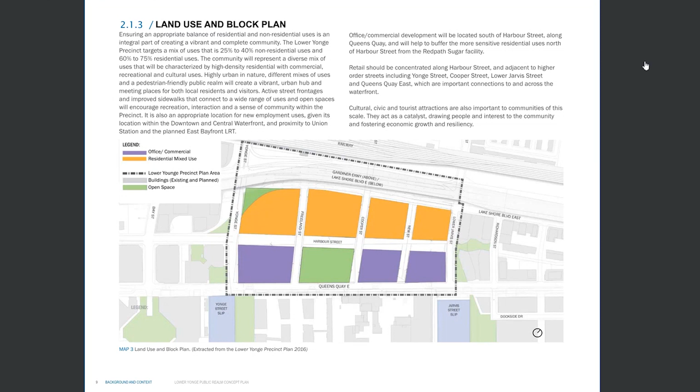And yes, we have that West 8 report ready, and it has been or will be shared - the report is with me - with this consulting team, so that the whole Lakeshore, when people walk through it, should get the same feeling. It shouldn't be that this portion looks different than that portion. It should have the same materials, trees, or planting - the feeling should be unique and consistent across the public realm portion.

Great, thank you for the clarification. It really helps me a lot. There were just some missing pieces that I didn't quite understand. So thank you very much.

Eric, you have a point you want to make? No? Okay, all right, I'll go to Jana. Oh, he's over here.

Yeah, are you there? I think Jenna left. Yeah, okay. Pat?

This is sort of an odd question, but I'm curious about the state of the art or thinking around lane widths in roadway construction. Is there a possibility to continue pushing to narrow the width? Is that part of the discussion about making streets more hospitable for pedestrians? Is there any continued research on that?